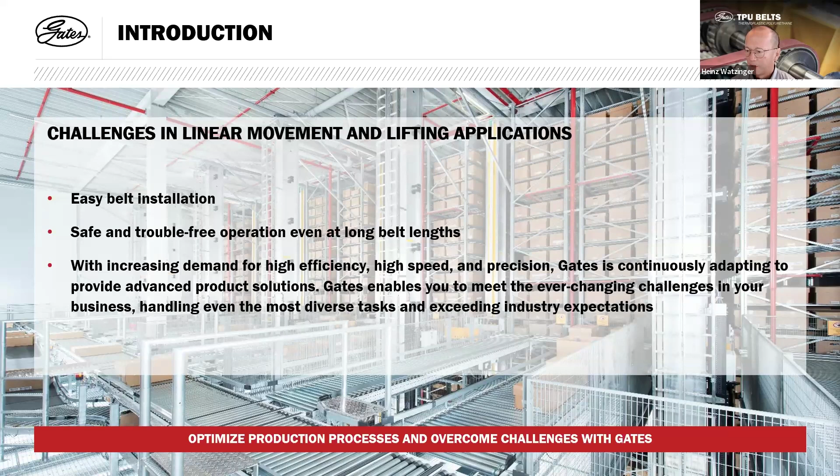A few years ago, so-called HOT, helical offset teeth belts were introduced to the market. They have been quite successful and solved problems with noise and self-tracking. However, this belt design is difficult, and so are the pulleys. Only very few pulley manufacturers can make these pulleys, and they are expensive due to the demanding machining process. Furthermore, customers reported belt wear when higher lateral forces apply. Therefore, we developed a belt design that addresses these issues and additionally is available in width up to 150 millimeters, which provides higher tensile strength than any of our competitors can do.

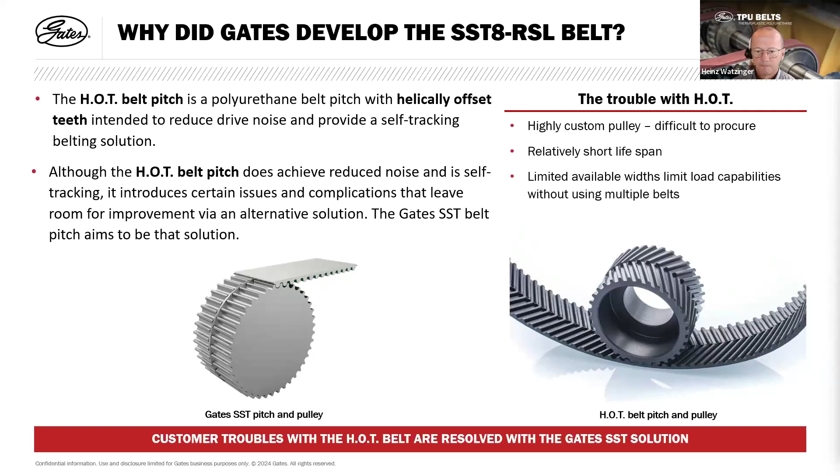So here are the customer's pain points and how we address them with our SST belt design. Belt installation. The longer the belt, the more difficult to adjust the side tracking of the belt on the pulley. Our solution is a pulley-centered tracking ring, which will track the belt right in the middle of the pulley. Only minor adjustments to reduce side forces are required.

Pain number 2 is competitor belt strength is limited by limited width. And with higher loads, you need to apply multiple belts to achieve the required load handling. Our Gates SST8 RSL belts are available up to 150 millimeter width and offer almost 3 times the breaking strength of competitor belts.

And pain number 3, HOT belt requires special pulleys, and only a limited market for these pulleys is available, and that leads to some obligation to buy belt and pulley from one source. Our belt SST8 RSL runs in standard HTD pulley pitch. The customer can produce their own pulleys or source them from any pulley manufacturer. Gates will support with the offset tooth design or offer the belt and the pulley system.

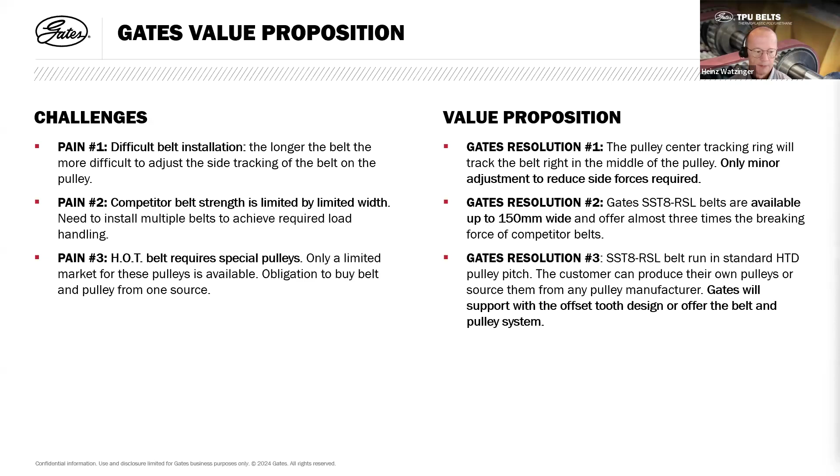Here you can see the belt design in more detail. The tracking ring will take the lateral forces with no tooth abrasion, one major advantage to HOT belt. At HOT belt, the pulley teeth wear the belt teeth when high side forces are applied. The offset teeth and the nylon fabric minimize running noise, especially at high speed.

The belt teeth are standard HTD8 geometry, the pulley design that all pulley manufacturers offer. And the RSL high-strength steel cord provides high breaking strength and high stiffness for demanding applications. Overall, a belt that is easy to install and great to operate.

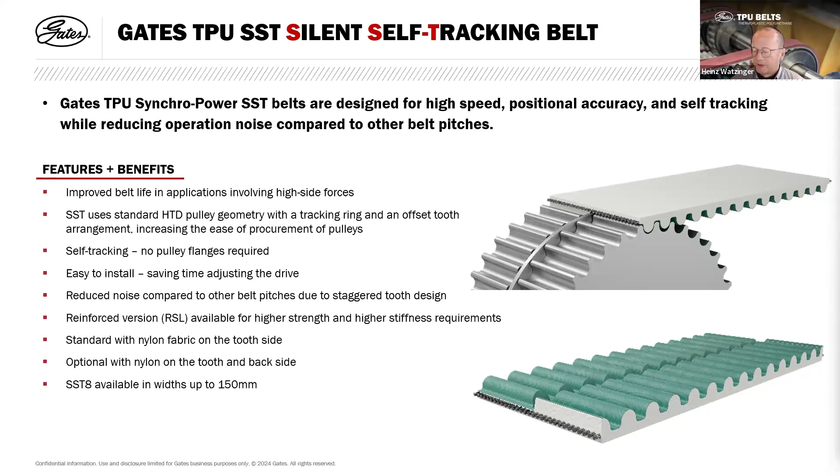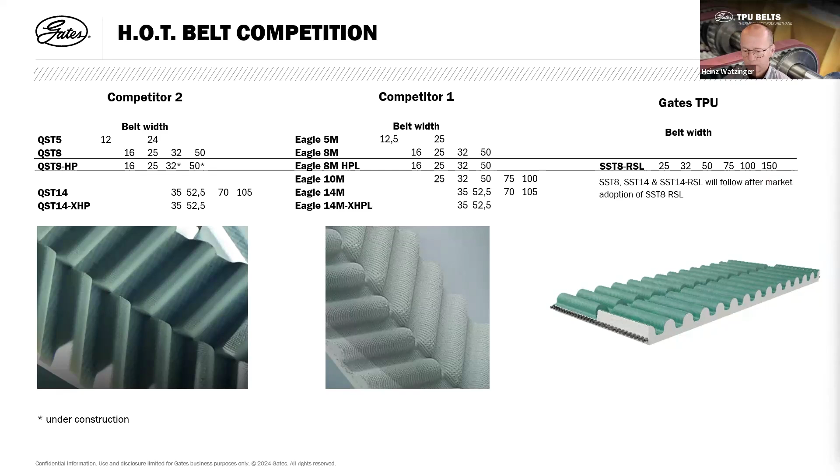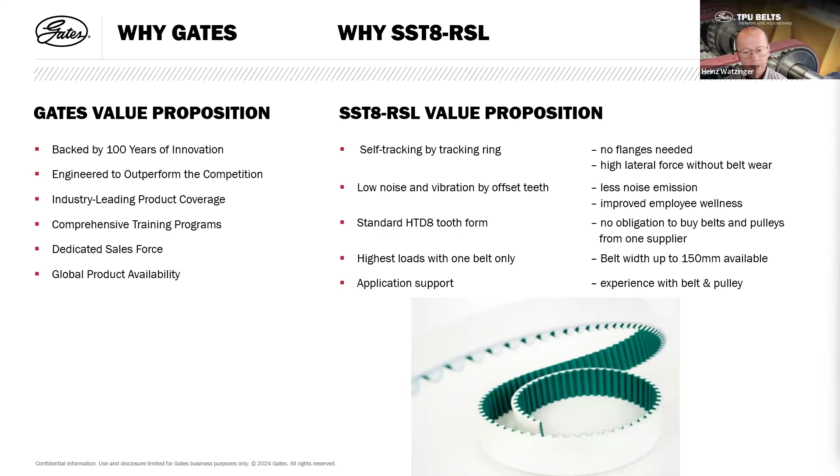Why SST8 RSL? Because it's another superior Gates product, solving problems in demanding applications when the belt does not want to stay on the pulley or when high lateral forces destroy the pulley flanges. It's saving installation time, taking higher loads than any competitive belt, and runs smoothly and quiet.

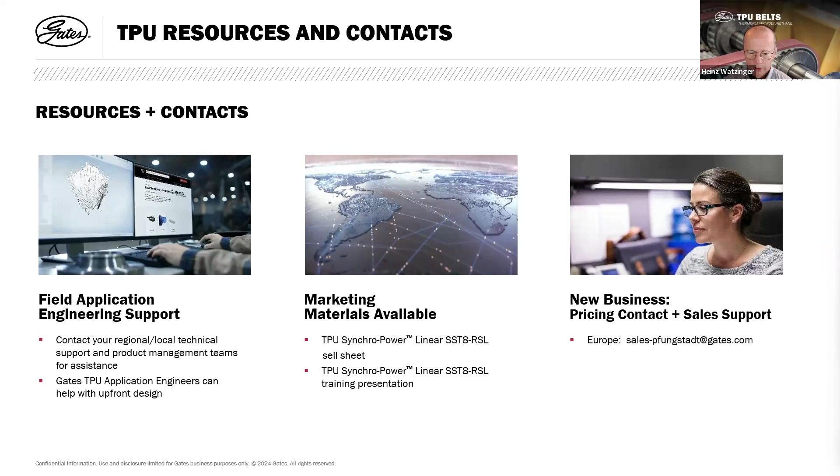And with this belt stiffness data, you can calculate the elastic elongation of the belt. But I can assure you the stiffness is very high since we've applied the RSL steel cord version, which is the really high strength steel cord.

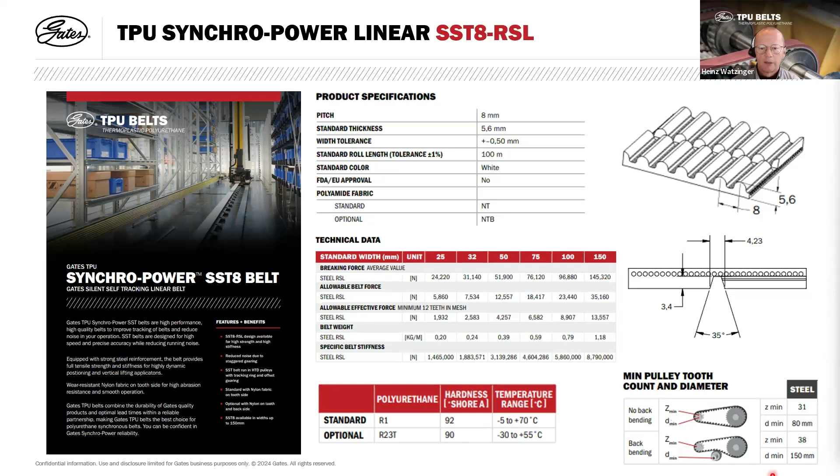Another question came up. Presentation is targeted to HTD belt. How does the SST belt compete against the standard HTD belt? The belt construction itself is the same as an HTD L8 belt, which is mentioned here. You can see the standard HTD8 belt, and we are completely in line with the standard HTD8 belt, also with our competition.

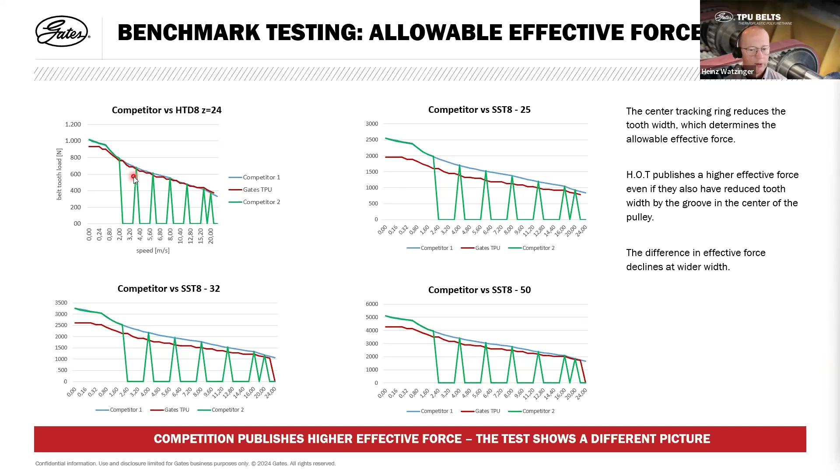So the allowable effective forces as well as the breaking force are completely in line with competition and also with our standard HTD L8 belt.

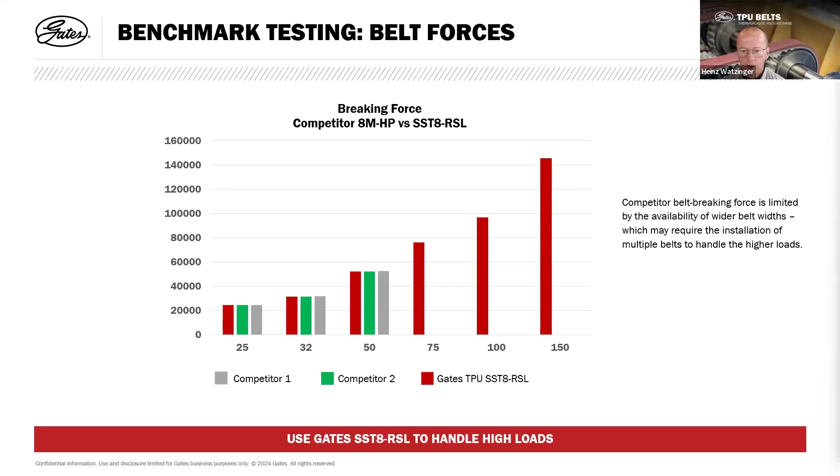Next question is about information on permissible lateral forces. That's very application specific. So far we don't have any data for maximum lateral forces because that also depends on the center distance of the pulleys, so we currently have no data that we can provide.